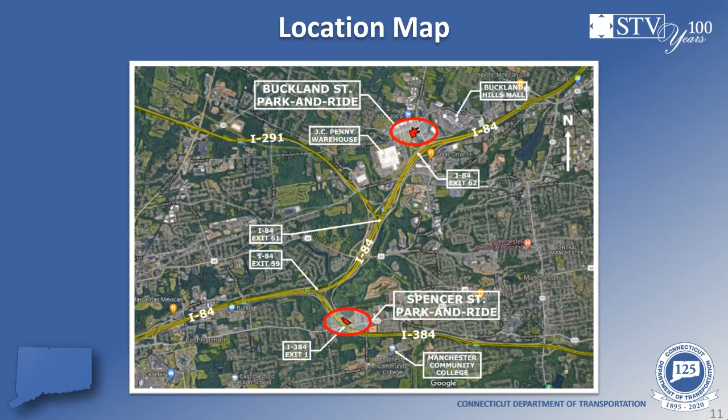The first project to be presented tonight is the Buckland Street Park and Ride. The Park and Ride is located at the corner of Buckland Street and Pleasant Valley Road and was built in the mid-1980s.

Today, the Park and Ride is improved with 3 side entrances, 2 from Buckland Street and 1 from Pleasant Valley Road, and is currently served by 3 existing bus stops. 2 bus stops are located within the Park and Ride, Stop A along the north parking lot edge and Stop B along the south parking lot edge. The 3rd bus stop is located on Buckland Street south entrance and serves local buses that do not currently enter the lot. The Park and Ride is improved with parking lot lighting and has a maximum capacity of 694 parking spaces, typically filled to only half capacity on average.

The 1980 approval included the ability to expand the parking lot to accommodate an additional 140 spaces along the western edge of the lot.

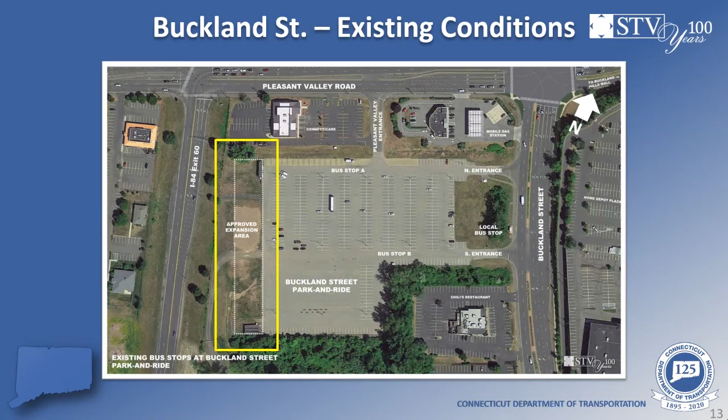The proposed improvements to the Park and Ride consist of replacing the 3 existing bus stops with a new Connecticut Transit double platform bus stop located in the middle of the parking lot, on axis with the Pleasant Valley Road entrance. All local routes will now use the new Park and Ride bus stop, allowing easy transfers from local to express buses. In addition to the bus stops, the Park and Ride is improved with an expanded bus layover area.

Located east of the Pleasant Valley Road entrance, there are new sidewalks from all 3 entrances, electric car charging stations that can serve up to 4 vehicles located along the east parking lot edge, plus new bike stands, internal signage, and new parking lot striping.

To offset the loss of parking, an additional row of paved parking stalls was added along the west parking lot edge, as well as a gravel overflow lot. Gravel was chosen for the overflow lot as a water quality measure. This additional parking all falls within the 1980 approved parking lot expansion area.

The new double platform bus stop will consist of 2 18-foot wide by 160-foot long bus stop platforms. Along the total length of the bus platforms are 2 12-foot wide bus dwell areas, where buses load and unload passengers. 2 12-foot wide bypass travel lanes are also provided to allow buses to maneuver through the bus stop. The east and west platforms will be divided by a 2-foot center island.

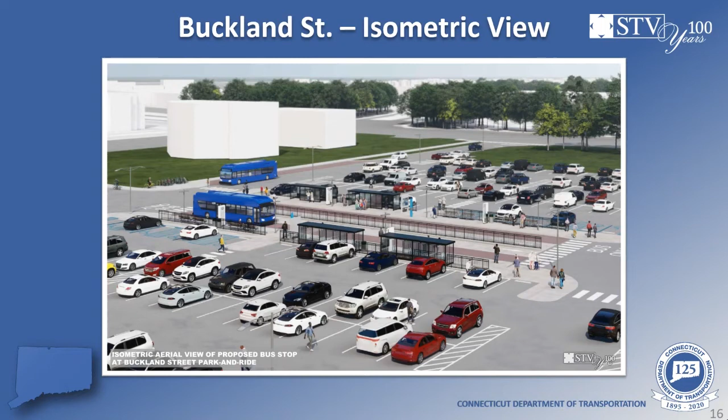To further improve safety and reduce conflicts with buses, fencing will be installed along the center island to prohibit pedestrians from crossing mid-platform. Fencing will also be installed along the rear of the platform to guide passengers to the end or middle entrances. Additional pedestrian lighting will be added to each platform.

Each bus platform will be improved with 2 heated 6-foot wide by 25-foot long bus shelters, as well as 2 Smart Stop e-readers displaying real-time bus arrivals, 1 kiosk, 1 emergency blue light call box, and several benches and trash and recyclable containers.

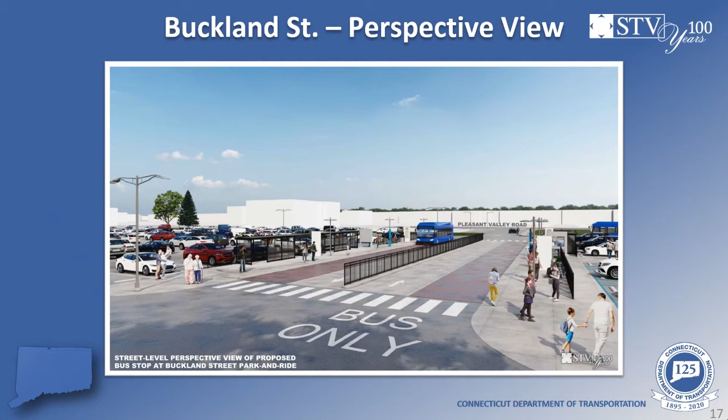To support the proposed improvements, the electric service located at the Buckland Street North entrance will be upgraded, and new telephone and internet service to support the emergency blue light call boxes and e-readers will be provided from Buckland Street South entrance.

Stormwater management will continue to use the existing drainage system that connects to Pleasant Valley Road. Drainage swales located along the south property line drain approximately half the paved area to a detention pond called Buggy Stowe Pond, located on state-owned land south of the park and ride. The remaining parking area drains to the west and is collected by catch basins located in the park and ride and within the I-84 off-ramp right-of-way. These catch basins and the outlet from Buggy Stowe Pond drain to the Pleasant Valley Road storm system via a 42-inch storm pipe that crosses the site in a northwest direction.

The total increase in impervious area remains less than what was approved as part of the 1980 design. However, we are adding vegetated swales along the west parking lot edge that will provide storage for the added impervious area and promote stormwater infiltration and water quality.

During construction, service to the 3 bus stops will be maintained throughout the construction phase. To do this, the center portion of the site will be fenced off during construction of the new bus stop, and one-way circulation will be implemented around the construction zone. Parking displaced by construction activities will be redirected to the underutilized southwest corner of the park and ride. A safe environment and access to the park and ride and all adjacent businesses will always be maintained.

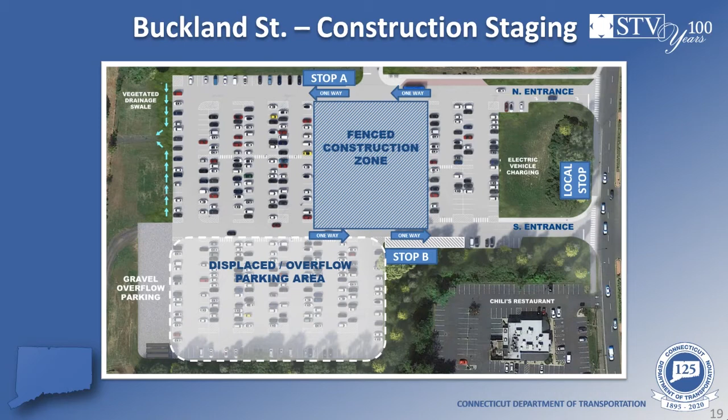The second project to be presented is the Spencer Street Park and Ride. It is located at the intersection of Spencer Street, Cemetery Road, and the I-384 westbound exit 1 off-ramp. The Park and Ride is currently served by 1 bus stop that receives Connecticut Transit and local buses in the AM and upon request in the PM.

The Park and Ride is improved with parking lot lighting and 249 existing parking spaces. Supporting the Park and Ride are 2 bus stops located just east and west of the Spencer Street intersection that also receive Connecticut Transit and local buses throughout the day. These bus stops are marked with signage and have no other amenities.

A 4-foot wide asphalt sidewalk connects the southwest corner of the Park and Ride to the bus stops and intersection. Pedestrians cross Spencer Street concurrently with southbound traffic to get to the eastbound bus stop. Today, there is no marked crosswalk over Spencer Street.

This assignment consists of the construction of 2 upgraded state-of-the-art Connecticut Transit bus stops to be located on Spencer Street. The new bus stops are designed to replace the existing bus stops located both on Spencer Street and within the Park and Ride.

Within the Park and Ride, the existing bus stop will be removed and the parking lot will be milled and repaved. Handicap parking spaces will be relocated to the southeast corner of the lot to be closer to the new bus stops. Electric car charging stations located adjacent to the handicap spaces will be provided, serving up to 4 vehicles. Currently there are 249 spaces. With the removal of the bus stop, this will be increased by 28 spaces to 277 total spaces.

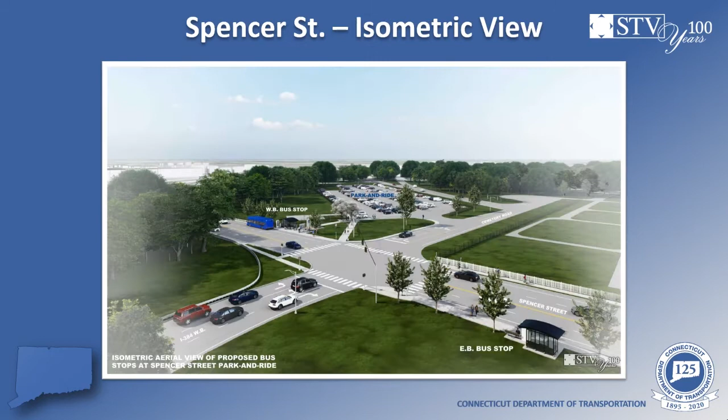Again, these bus stop, sidewalk, and crosswalk enhancements will increase passenger safety and visibility while crossing the intersection or waiting to board. The westbound bus stop platform will be improved with an 8-foot wide by 16-foot long heated bus shelter.

Plus a CTfastrak ID sign, 1 kiosk, 1 Smart Stop e-reader, which will display real-time bus arrivals, 1 bicycle rack, benches, and trash and recyclable containers.

Pedestrian lighting will also be added on the westbound side at the bus stop and along the sidewalks leading from the park and ride. The eastbound bus stop platform will be improved with the 5-foot wide by 10-foot long bus shelter, 1 Smart Stop e-reader, and 1 wood bench.

Also visible in this isometric are the new crosswalks, accessible sidewalk ramps, and pedestrian signals proposed for the intersection.

The westbound bus stop requires the relocation of the utility pole, which falls within the bus platform area. The existing park and ride electrical service and cabinet will be upgraded to provide power for the westbound bus stop amenities, pedestrian lighting, and electric car charging stations.

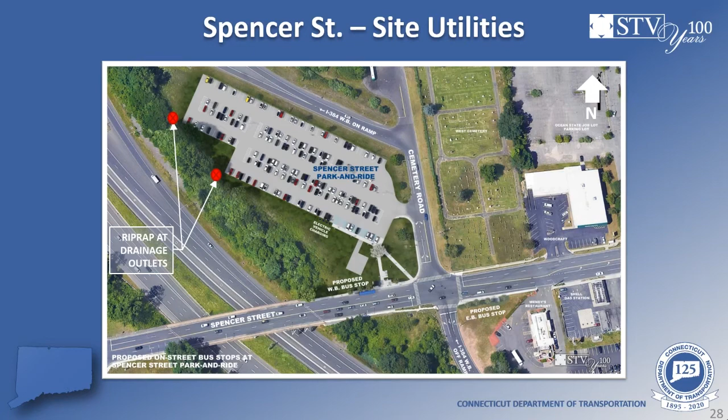Construction will begin at the eastbound bus stop, followed by the intersection and cemetery road improvements. Then the westbound bus stop. And finally, the park and ride.

During construction of the eastbound and westbound bus stops, passengers will be detoured to the existing bus stops located at the Woodcraft Store and ShopRite Supermarket, approximately 1 block to the east. Customer notices will be posted in advance of construction.

Handicap accessible parking and pedestrian access to active bus stops will always be maintained, and Spencer Street will maintain 2 lanes of traffic in both directions throughout construction.

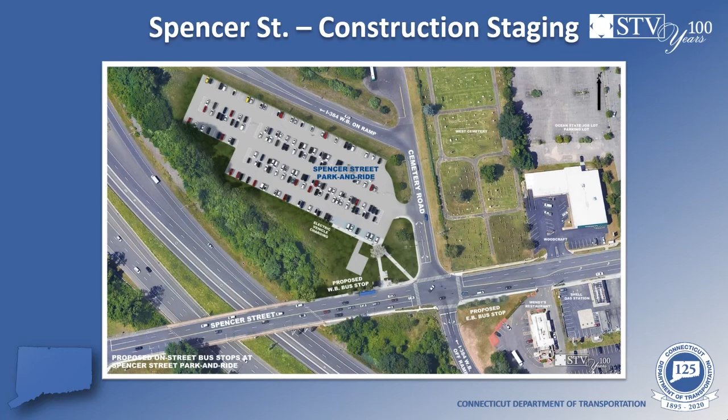The project design and advertising phase is scheduled to be completed in the fall of 2022, with construction starting in the spring and ending in the fall of 2023.

The estimated cost for Buckland Street is $2.4 million, and for Spencer Street, $1.5 million. Both projects are 80% federally funded and 20% state funded.

This concludes our presentation of the proposed improvements for the Buckland Street and Spencer Street park and rides. I will turn the public hearing back over to Eric for questions and answers.

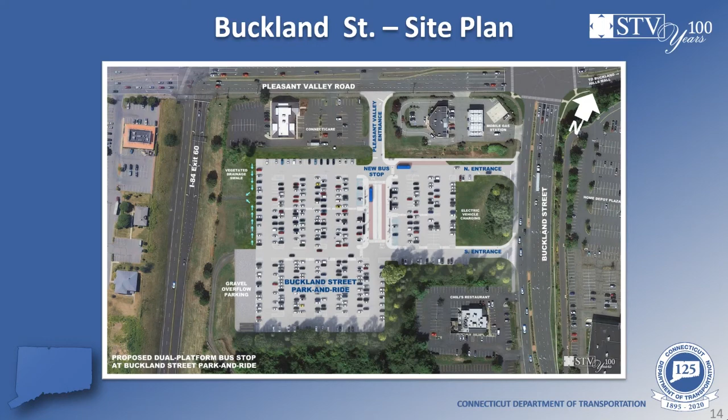So we have another question that just came in. It asks, how will traffic be impacted during construction along Spencer Street? I believe, Mike, you might be able to answer that.

If I can, yes. So, Eric, we understand there's a lot of congestion, particularly in the PM peak hour. So we're going to be limiting our construction to strictly the shoulder, and we'll be keeping 2 lanes of traffic in each direction open at all times. So there should really be no impacts to traffic during construction.

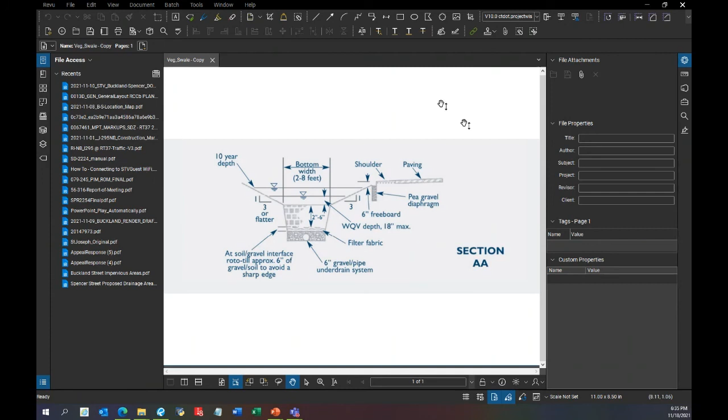A vegetated swale is a ground depression or channel that contains flood-tolerant, erosion-resistant plants. Vegetated swales promote the conveyance of stormwater at a slower, controlled rate and act as a filter for removing pollutants and allowing stormwater infiltration and retention. Additionally, vegetated swales are generally adjacent to impervious surfaces, so in this case, the park and ride, and can provide an aesthetic value to any given site.

Great, thank you, Larry.

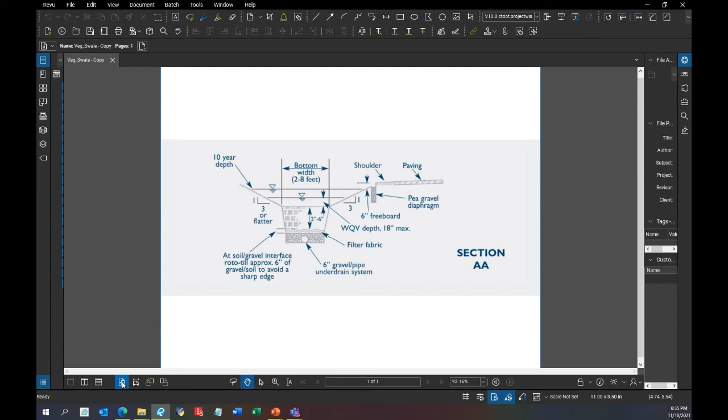We did just get a new question. There's a question that says, will there be temporary bus stops on Spencer Street during construction? I believe Brian from CT Transit, you might be able to answer this one.

Sure thing. On Spencer Street, first off, the service to the park and ride lot itself will continue to operate as it does now, up until the completion of the project and the opening of the two new bus stops out on Spencer Street. The two existing stops, the one in front of Wendy's and the one in front of the park and ride lot, are going to be closed for construction one at a time. During that time, customers will be directed to the next adjacent bus stop. For the westbound folks, that would be the bus stop over in front of Woodcraft. And for eastbound folks, it would be the bus stop over at the ShopRite Plaza.

Okay, great. Thank you, Brian.

Looks like a new question just came in. Does the town of Manchester support this project? I guess I can briefly answer that.

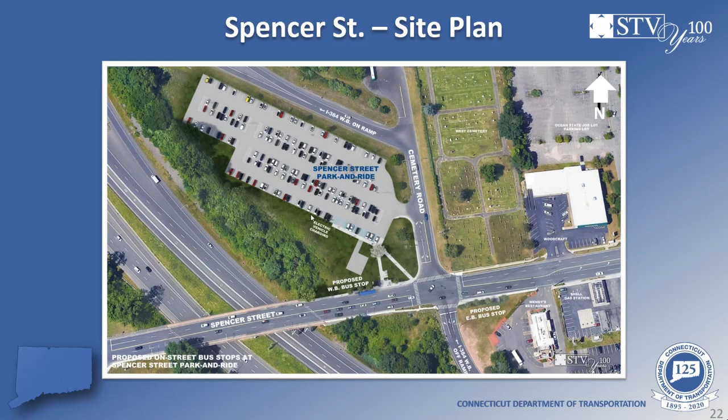The town of Manchester has been working with our project team throughout the duration of this project, and they have announced much great support for the project. So yes, overall they do support this project, and they will be continuing to work with us as we move this project along from design to construction.

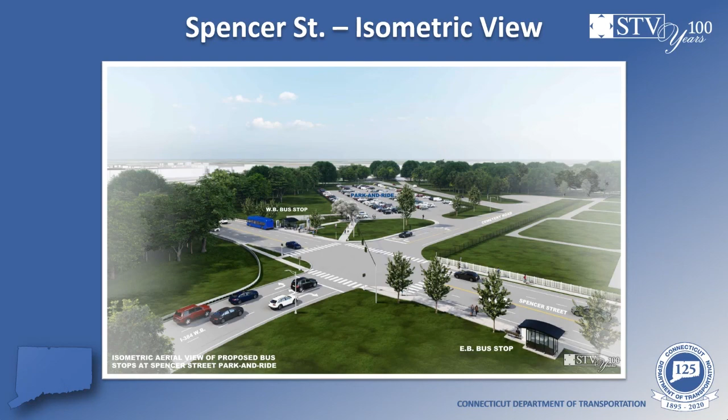We are going to be closing the meeting shortly, but we did want to reach out one last time to see if there are any additional questions or feedback, and we would love to hear from you. Actually, as I said that, we do have another question that came in, and the question is, what kind of information will be available on the tablet e-readers?

Lisa, do you want to answer this question? Sure, Eric. The e-readers are going to be providing real-time information on bus arrival times, and they're designed to be easy to read.

They're kind of like a paper white screen, so there's no glare from sunlight on it. They will have an overhead, solar-charged light, so that it'll still be visible at night for our customers.

Okay, great. Thank you, Lisa.